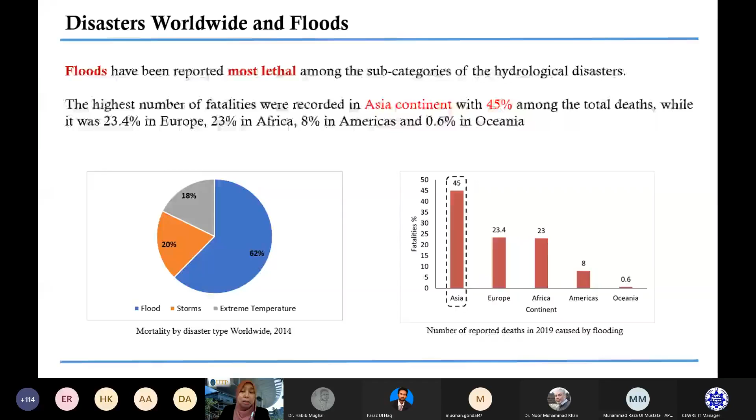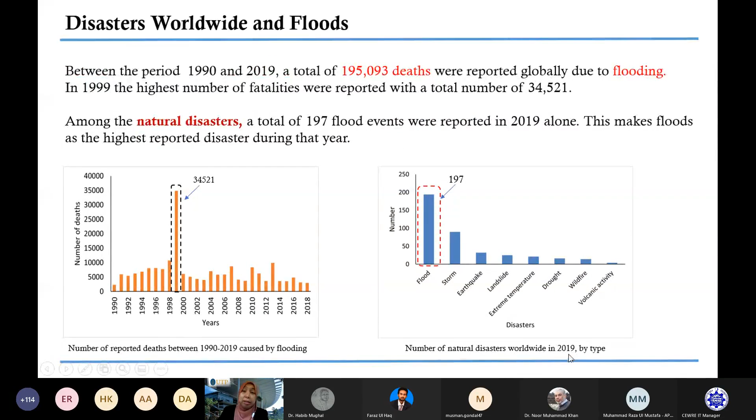So that is Asia. And if we look at all the data, look at the highest peak in 1999, 34,000 victims of flood. Some of them are deaths. So from the year 1990 to 2019, 195,000 deaths were reported. And floods themselves, in the 2019 data, showed to be 197 within a year.

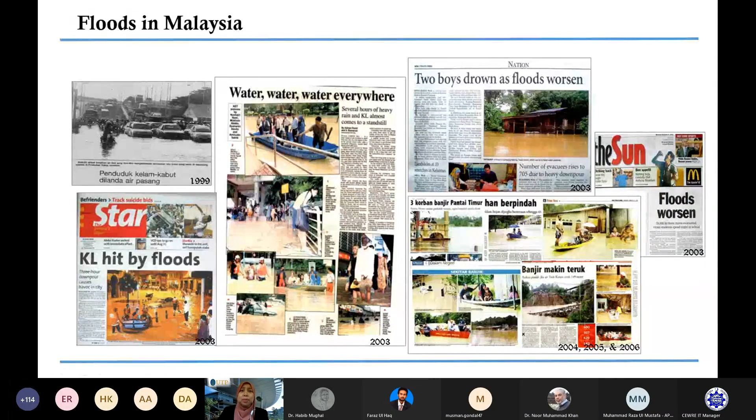Bringing you to Malaysia. So this is Malaysia. That's why we are in big concern about floods. These are all the facts and the truth from the newspaper cuttings. We have had floods up to three-story levels in 2014, if I'm not mistaken. So we had to know, how do we deal with it? We need the rain. We love the water. But how do we deal with it? So this is what happens in Malaysia.

Now, looking at the time, I'll bring you to the scope. Low-lying areas. Where are low-lying areas? Why do you have low-lying areas? For some reason, you're not aware of those low-lying areas because we are so busy with urbanization. When we do urbanization, sometimes our roads become depleted with time. And the problem with these roads: if our roads here are going down, those are the low-lying areas.

And when they are so close to the rivers, just like next door, very close by, whenever you have rain coming to your river, it will also bring the water towards your low-lying areas. So in our context here, it would be on the road. So our focus is on the transportation system.

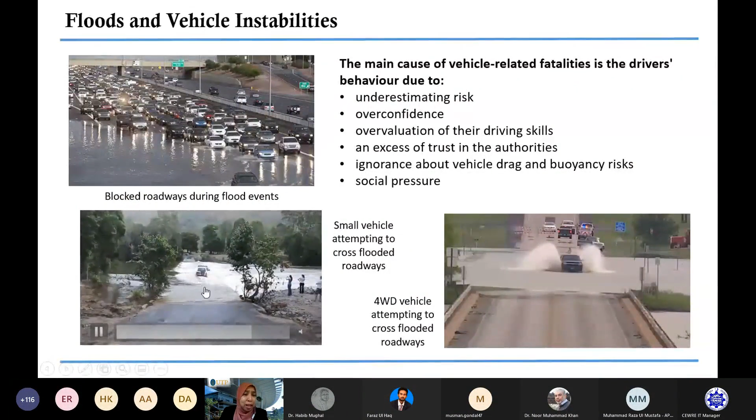Look at that. So this is Malaysia. And I have with you some nice clips here. This is a very small vehicle trying to go there and then, bump, got into the flood. And another one, a very strong four-wheel drive. They thought they could just pass through this road. The low-lying road has been flooded. They thought they could pass through because it's a four-wheel drive car, but no, it's not the case.

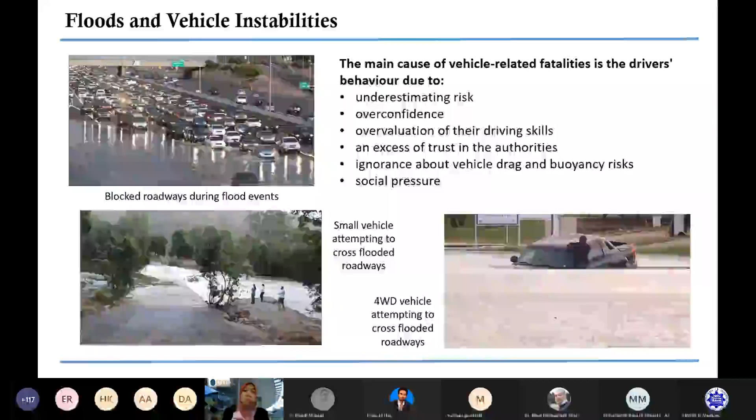So people underestimate the strength of water, the strength of the water velocity, coupled with its depth. When these two are combined at low-lying areas, you have to watch out. You may not be able to just pass through happily because we want to go home, right? We're just tired of the day. We want to go home.

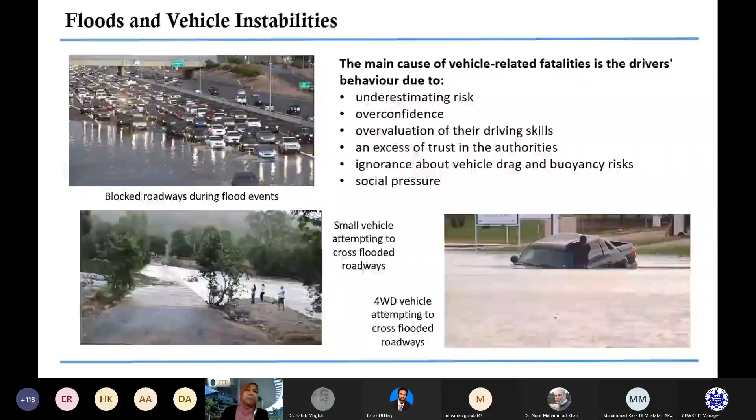We tried our luck. So it is not luck. It's not something that you can take for granted. But this is something people forget. But now we are working in detail to find out how to go about it. So these are the data. Okay, fatalities because of vehicle drowning.

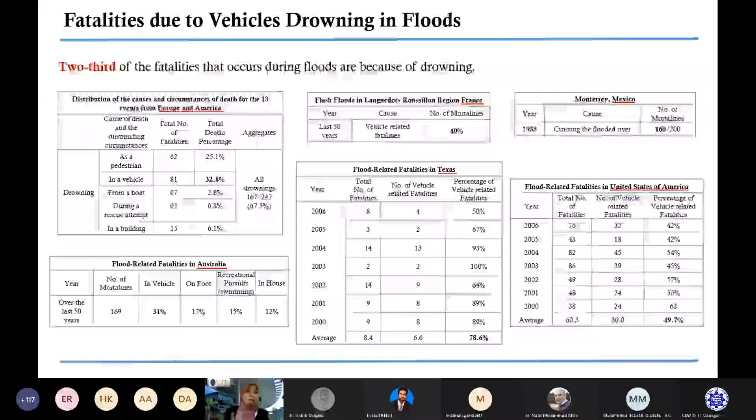Okay, now I have shown you 2 cases just now in those nice video clips. But actually around the world, there have been a lot of fatalities due to vehicle drowning. So these are the data that I'm showing you from Europe, America, Australia, France, Texas, Mexico, USA. Malaysia has not reported yet, but we have the cases. It's just not all countries happen to report. But these are very worrying because it's involving us, the vehicle users.

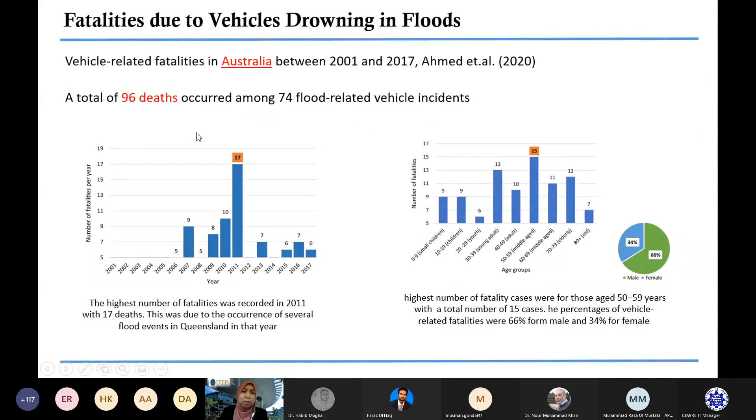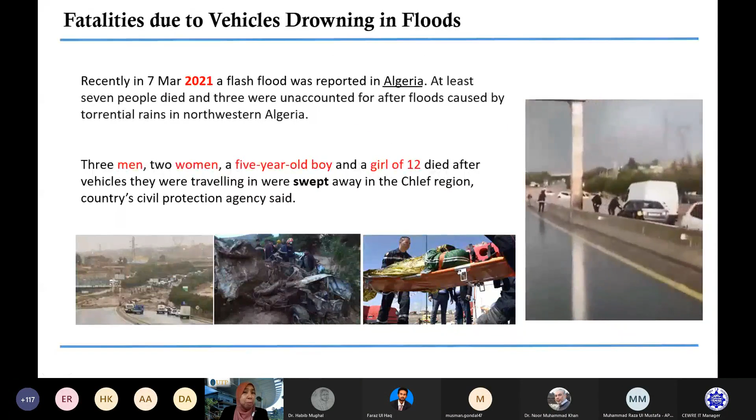Why? Because this is the basic. The basic comes from the vehicle itself. Now, when the vehicle is submerged into water, you have to understand there are several hydrodynamics that have to be taken care of properly. These are the hydrodynamics on the left-hand side that you can see. That is the car. So whenever you bring your car into the water, be careful, because under certain combinations of velocity and water depth, you may not be able to cross the road.

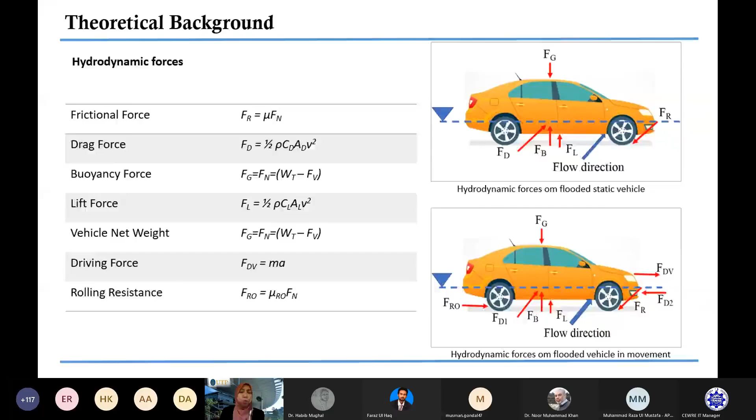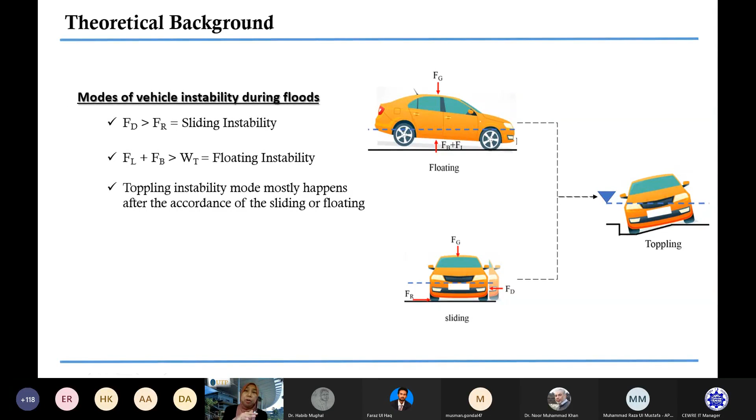So we have done a lot of research on this, and we've eventually classified that a vehicle can either float, can either slide, or in the worst case, they can topple. So we have equations to describe it. We have all the algorithms. And now let's see, how do we bring our expertise and strength in the hydrodynamics, in the equations, into the language of the world? This is the IoT.

So in the basic IoT, there's a lot of things, right? But I'm just going to make a summary. The IoT is something we like so much because it gives us quick answers to everything. But in our context for flood management, we can monitor, we can track, we can control, we can sense everything by the use of real-time data. So that is the keyword. Real-time data is the keyword. That is why people believe and trust in IoT technologies, because we like to know everything in time.

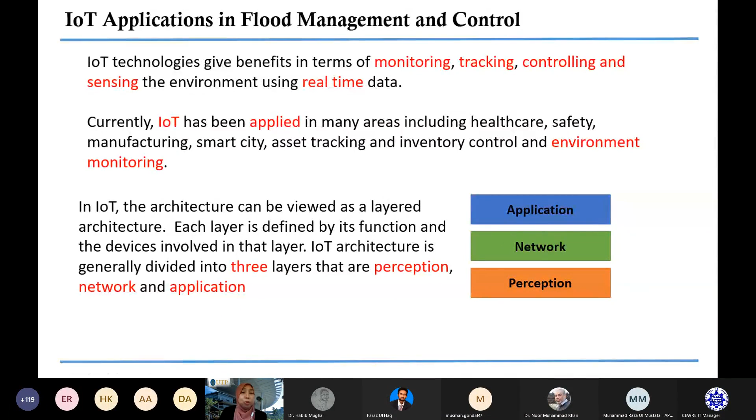But as you try to make a framework towards that, you will have to know the 3 things in the framework linked together to bring it into the right concept. So it's always about the perception of people, the perception of the problem statement, but then you've got to make it into your algorithm of network and then you apply. So that is the basis. So for our side, we will have to know these 3 in order to bring our product into reality. So there are several ways. As I said, I'm not the best in explaining the IoT technologies, but at least the basics for us to know are these.

You need to have sensors, because we are dealing with hydraulics, hydrology. We are dealing with rain, water. That's our best friend. So you need a sensor to be able to measure them. When you have these sensors, they will be telling you the real-time information. It can be the water depth, it can be the velocity, it can be the frequency, up to you. You can select and pick what you want to be sensed, to be monitored.

Then you bring it to another technology called Arduino Uno or something else. And as we speak, there are more to come, right? But with this, we can visualize the readings, Arduino Uno, and then we bring it into Raspberry Pi. It transfers data to the cloud. You have to bring it to the cloud.

If you bring it to the cloud, then okay, now we have a topic to discuss, because everything has to be real time, everything has to be big data. You are going to store all your data from day one, and it is going to be evaluated. It's going to be a lot as time goes by, every second, every hour, every day, every year. So you are preparing yourself towards big data. So you need to have it in the cloud. And later on, with your algorithm, your equations, people will know what you want to sell.

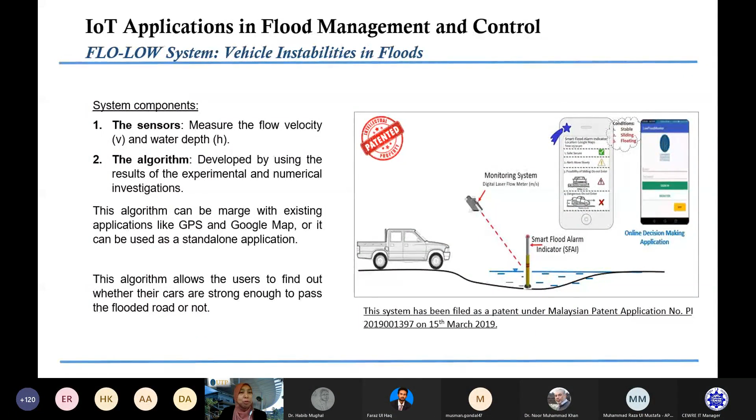And from there, you will be able to see. So you are in the car, holding your phone with the apps installed. And what you have to do is bring in the information of the velocity and the water depth at that point. And then you put it in the apps, and then the apps will say, you are safe to cross. Otherwise, no, don't. You are going to float, or you are going to slide, or you are going to topple. So the equations will tell based on only two parameters, velocity and water depth. So those are the important things. Without this framework, we cannot do it.

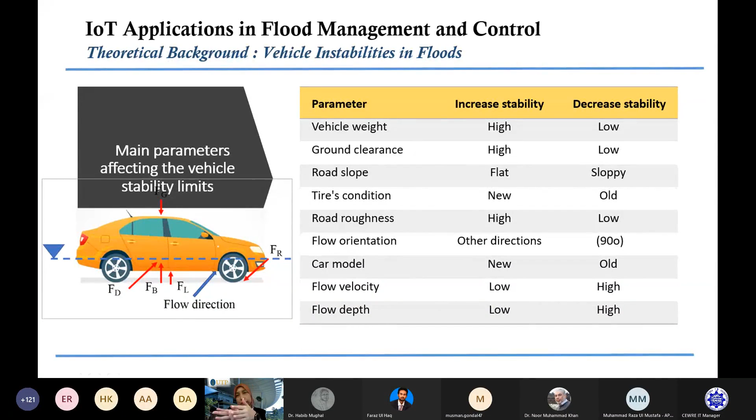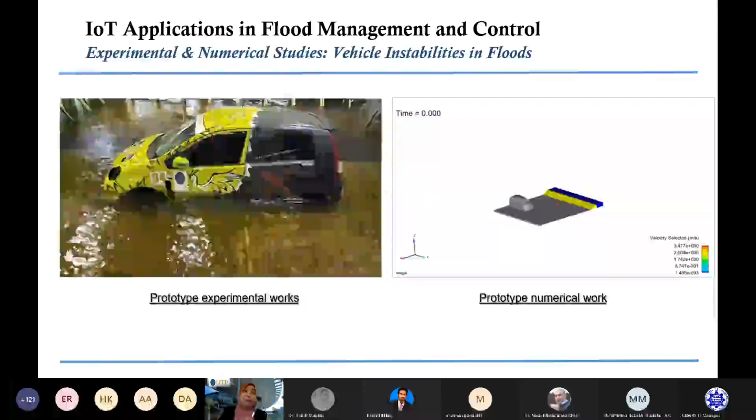So again, this is a little bit more detail if you are dealing with the road. So you need to have some more information about the condition of the road. And then how do you place your car? Is it going to be really straight adjacent to the water, or are you at a certain angle? So we have made detailed analysis on that, because we have brought our real car into the lab. So this is a car, a cheap car in Malaysia, small vehicle. We put it in the lab, we push it under big water in the wave tank, and then we try to see, is it going to slide, is it going to topple, or is it going to float?

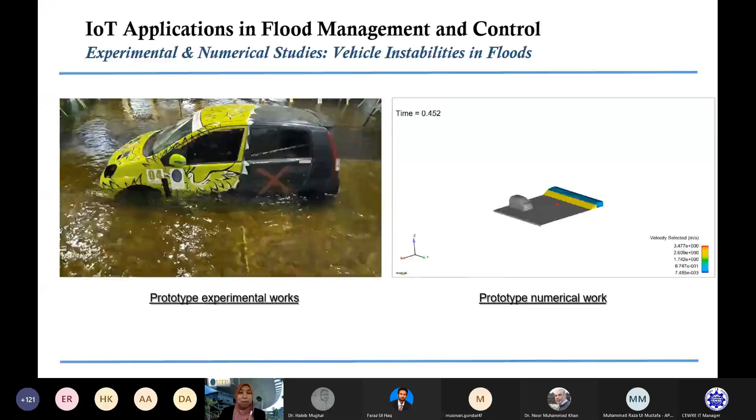And we replicate that in numerical software, because we can't afford to have all the cars in the world. But we tried that under certain information on the approaching velocities and approaching water depth. So these are the simulations. You are seeing the waves are moving, so your car is moving as well. So this is the first study in the world involving moving cars in low-lying areas. Okay, so let's go to the other view. So this is a detailed view of our experimental setup. How we put it in proportion to the wave tank, and this is how the numerical supports it.

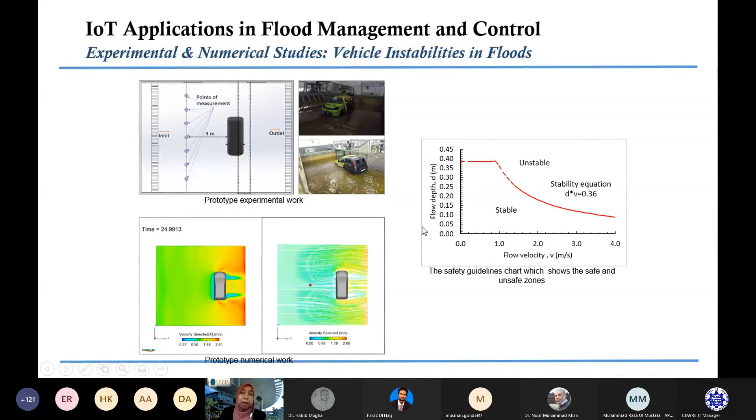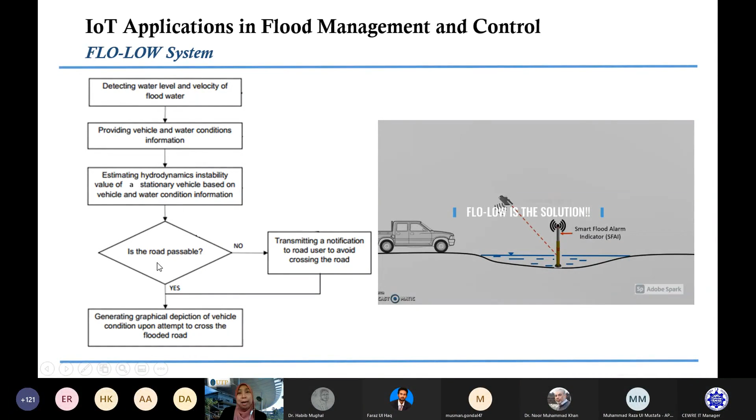And eventually we prepare a simple diagram, a simple graph, because sometimes you have to transfer your complicated equation into something simple, because you want to use it for the end users. The end users may not see your equation, but from here they will know, am I stable or is my car not stable? So this is the final product that we have. And again, if you want to know more on the sequence, we started with the velocity, we started with the water depth. So this is you trying to pass through. Then the equation will say, is it good or not to pass, or to go back, or just to stay until the rain recedes. Then only you go back, okay?

So finally, this is my last slide, last page. This is how we are developing our apps. So the apps are by the name of FLO-LOW. We are at the final stage of it, and we welcome any potential collaborators, any potential commercialization partners to sell our product in the whole world, because we know there's a lot of fatalities in the world. So as a simple layman, you have to prepare your apps based on what they think.

So you start them to just register and then try to see where they are, what is the flow velocity and water depth. So they will key in. They don't need to see anything else, but they will just be brought to the next one. Either you are safe to cross, or don't, dangerous, you will float. So this is one of the initiatives we are doing back in UTP. But that is our first step towards bringing the technical hydraulics and hydrology into the language of the fourth industrial revolution, which is the IoT.